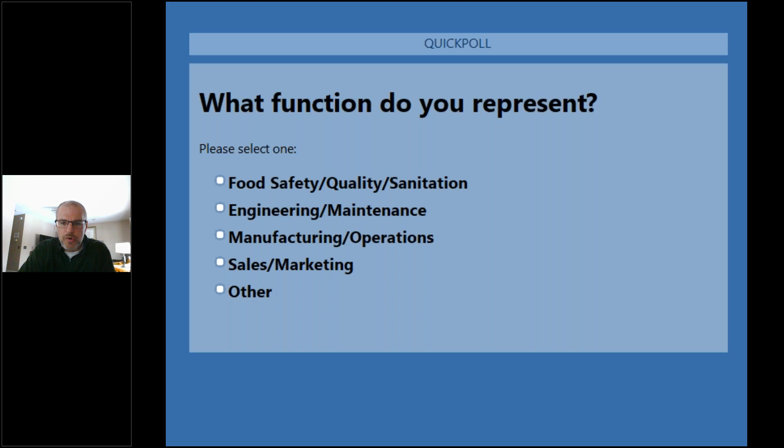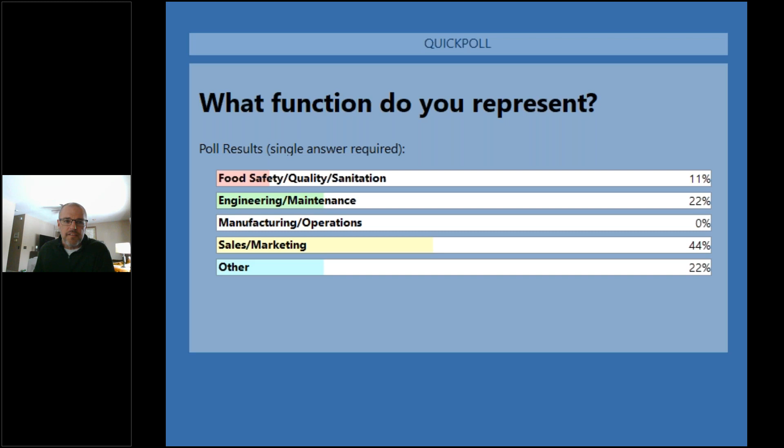This isn't just the function of the food safety and quality team. All of these functions are critical to delivering safe quality food to our consumers. So back to this keeping things simple concept. I like the KISS philosophy, and I've changed the wording a little bit here, but I like to, number one, obviously keep things safe, but keep it simple as well. And I think if we focus on standardization and keeping things simple going forward, it'll drive improvements around food safety, human safety, improving the environment, sustainability, and equipment reliability. All of these things will benefit from us thinking about simplicity of processes, equipment, and managing our people and processes.

So I really like the fishbone tool, and I think it helps explain where I'm coming from on this, to really think about reducing losses. It's sometimes hard to get people aligned with some of our goals and expectations. A lot of plants and companies are doing a really nice job managing food safety and delivering against those goals, and it's maybe hard to get some changes in that area. But if we can get people aligned with, hey, we can not only deliver safe food, but we can deliver cost savings and capacity to the business by focusing on this metric that I'm going to introduce here.

But we really need to align on this concept of simplicity and standardization, which again will drive food safety as well. So the three I want to highlight here are machine, method, and thinking about our personnel as well, and we'll get into more detail there. But the driver for all of this, and the metric that will be the catalyst to drive this, I believe, is thinking about how do we reduce the labor per unit operation.

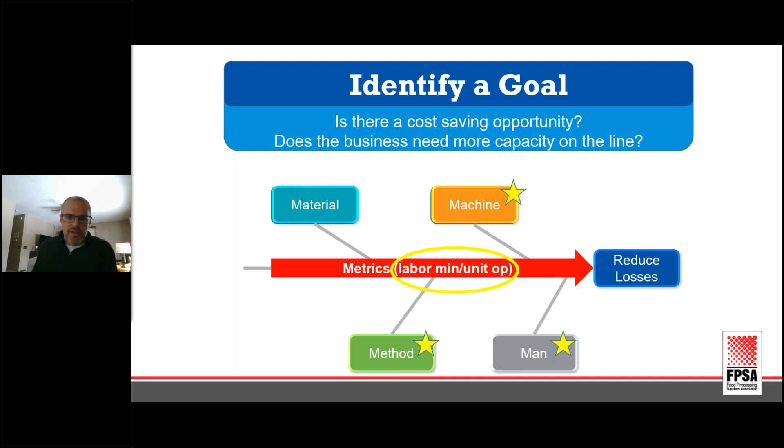So the first one I'm going to focus on here is the metrics, right? So we think about those downtimes kind of as a black box, especially as it relates to changeovers. So how do we break open this black box?

You think about, hey, we're really running blind when we shut our systems down to do cleaning and changeovers and all the activities, whether it's inspection, maintenance tasks, setup, while we're shutting down those systems, especially in areas where we're doing manual cleaning, which is obviously the case in a lot of the low moisture food, baking, cereal, snacks type of environments that we're focused on today.

So we want to go after understanding the time, the resources, and the labor that's being tied up into that. It's challenging, right? It's not like we have an automated system where, like when we're running our equipment, we know how fast belts are running, how many cases are coming out the back end. We've got all that information coming at us, and we can measure and report against that. We've got to figure out a way to do that during our planned downtimes and these activities as well. So we've got some ideas on how to do that and drive that forward.

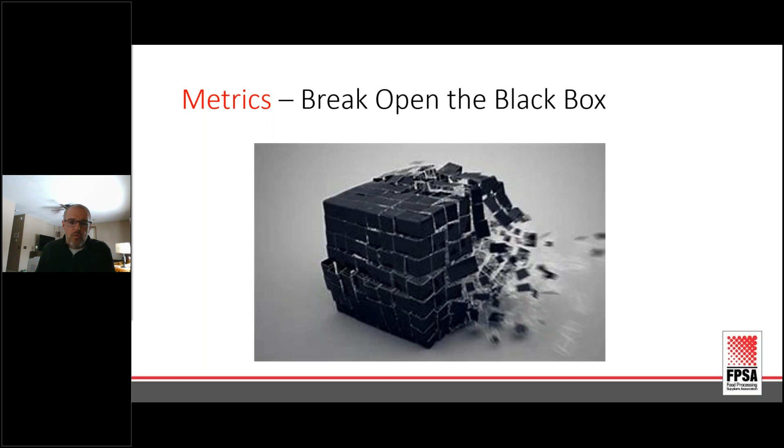So really want to focus on labor reduction, right? If we can simplify downtime activities, I want to drive down the amount of time I'm spending in these activities. Just like I mentioned earlier, in your kitchen, you want to get in and out of there very quickly and do something more value added and more interesting than cleaning or maintaining an area. So how do we get our people skilled up to do those tasks and simplify those skills as much as possible?

Just like in my kitchen, most people can go into a kitchen and handle the minor amount of disassembly and cleaning processes that are in there, put things in dishwashers, and meet the expectation. We get into our plants and there's a lot of complex unit operations, and it sometimes takes a whole toolbox full of tools to dismantle and get access to clean those adequately. So how do we drive towards more of the environment that's like your kitchen and simplify things there?

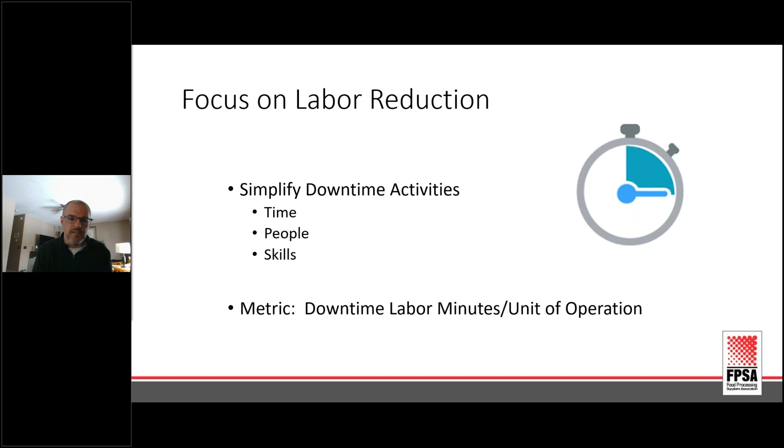So again, focus on this metric of looking at downtime labor minutes per unit of operation and really understanding, with that information, where are our bottlenecks at? Where can we push back on the equipment manufacturers and maybe modify current equipment to drive down that time? It might be simple things like maybe we could change the guarding so it's not so heavy and complex that I need two people to remove it. Maybe I can change the hardware so it's a simple tool or no tools. There's a lot of basic concepts that could gain us a lot of time and efficiencies, and then drive down food safety risk as well, not only from a micro or allergen standpoint, but also minimizing the risk of foreign material because somebody put something in the wrong spot or didn't assemble that unit op correctly.

So I think that, oh, go ahead. I was just going to say, when people think of downtime, there's planned and unplanned. When you're referring to this metric about downtime labor minutes per unit of operation, you're talking about total downtime, both planned and unplanned, correct?

Right, I think our biggest opportunity right now is the planned downtime. There's still so much opportunity there where we know we have to shut down systems for formula changes or food safety reasons, like an allergen change or a micro risk that if I continue running, I'm going to increase to an unacceptable risk level. So I think the big opportunity right now is our known planned losses and going after those. And then I think there'll be a huge benefit to unplanned as well, and we'll minimize some of those unplanned losses too. But this is the primary focus right now, is planned. Thanks for the question, though.

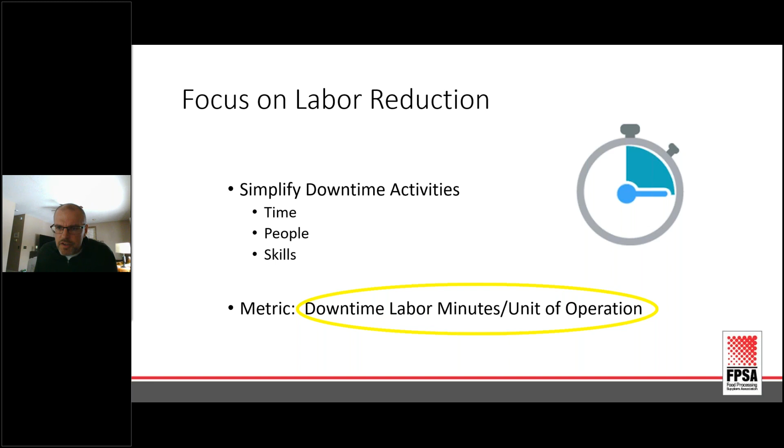All right, I'm gonna try, my next slide is related to education. I'm gonna try to do another question here under the polls. Let's go back to the kitchen analogy. Hopefully this launches and you can answer the question around what is the source of the highest bacteria counts in your kitchen gonna be?

Hopefully people see that. I don't see any answers yet, so I'll let you work on that for a few minutes while I talk about something I'm really passionate about.

Our personnel and education are key. We need to understand the audiences we need to educate—not just our plant personnel, but also the original equipment manufacturers. How do we advance from just focusing on sanitary design, where we've made huge advancements in recent decades around sanitary components and basic principles, to now designing in sanitation? How do we think about and model sanitation ahead of time, and prepare to minimize the impact?

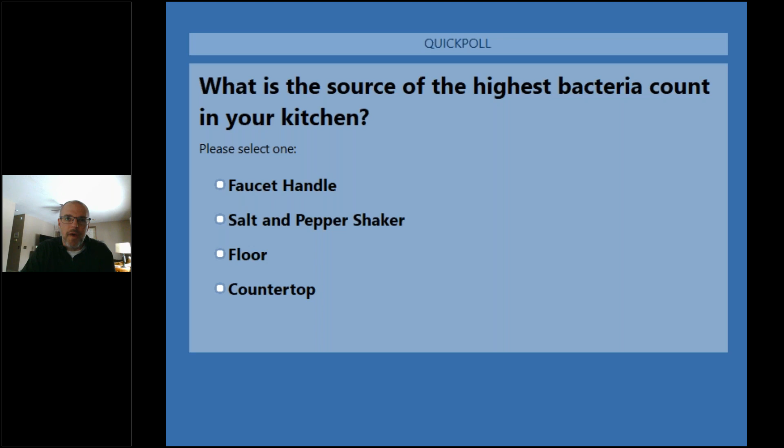How do we design equipment so it gets clean during the cleaning process—just like your car? How would I design a car differently so it got cleaner going through an automated car wash, or made it easier for a person doing their own cleaning? This concept of advancing to make it not only an effective cleaning design, but an efficient cleaning design as well.

Then there's onboarding and orientation of the people executing these tasks—full-time employees, temps, seasonal workers, and their leaders. More and more, sanitation tasks and many food safety tasks are being executed by operations. So how do we give them the information they need to succeed in executing those tasks?

The answers: 38% said faucet handle, 50% said countertop, 13% said salt and pepper shaker. Surprisingly, the salt and pepper shaker.

The reason is it's an area that gets touched going back and forth—salting and peppering meats, then touching the meat after it's been prepared, maybe using that shaker again. There's not great separation between raw and cooked, and people just aren't thinking about it or addressing it regularly. So maybe take a few minutes to wipe down your salt and pepper shaker, as it could be a point of contamination for bacteria in your kitchen.

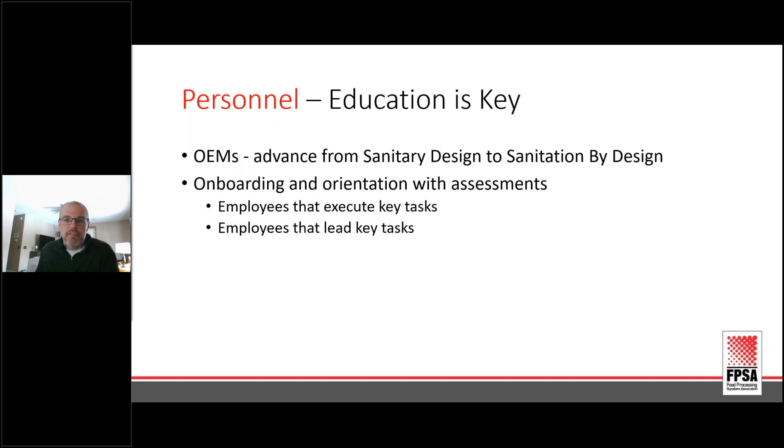I'm super passionate about training and education, and I think we need to think about how to do that differently going forward. We've got challenges, especially today, staffing our facilities—how do we get people up to speed faster, and what's the best way of learning and educating them?

For me, at least at home, when I'm learning a new task or facing a challenge, I go out and YouTube it. I figure someone else has probably already figured this out and maybe has a nice tutorial, a how-to video on how to do this.

We've done something similar. If you search the internet today, you could look under General Mills sanitation videos—I've created a few videos out there that hopefully you'll find helpful, covering some basic concepts, chemical titration demonstrations with one of our suppliers, and how to do a post-cleaning inspection.

We've also thought about the audience, knowing that language can be a barrier, so we've done this in multiple languages. You'll see there's an English version, and then also the language we've translated it into as well.

That's not the whole answer, though, because it's sometimes difficult to get our employees in front of a screen—whether it's a smartphone, tablet, or computer. We don't have unlimited resources there either, so we have to figure out how best to get our messaging, information, and training to our employees.

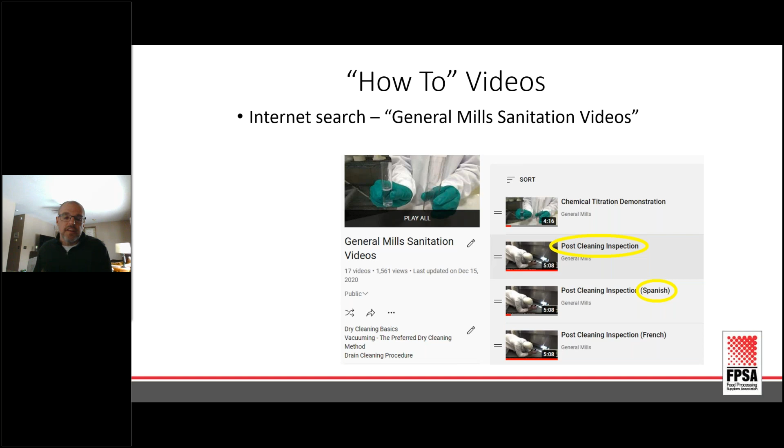Part of the solution might be giving them simple, short videos and tasks that they can rewind and watch again, to make sure they really understand how to do it well.

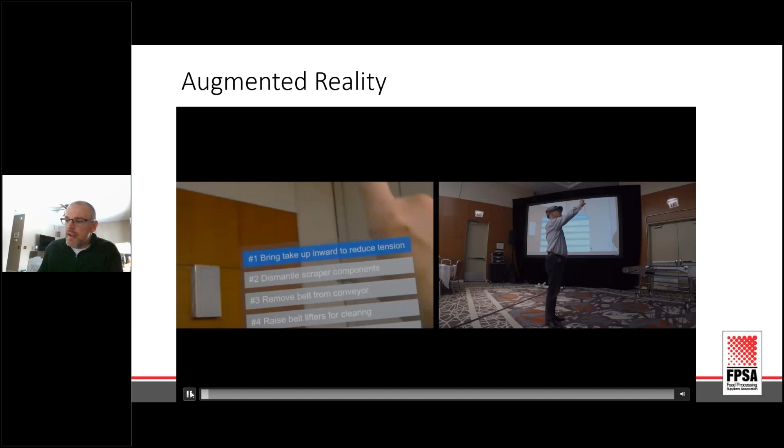Another tool that I've seen that I think has a lot of opportunities is augmented reality, and virtual reality as well. The example I'm going to show is from a workshop where we brought in a conveyor and a company to help us with a headset and augmented reality of the situation of how do I clean and dismantle this conveyor.

Here's a short clip that walks this gentleman through how to dismantle this conveyor, having the virtual conveyor in front of him through his lenses, but then also having the real conveyor there for him to actually execute and test out his skills now that he's learned them and walked through the steps. Hopefully you can see this advancing here.

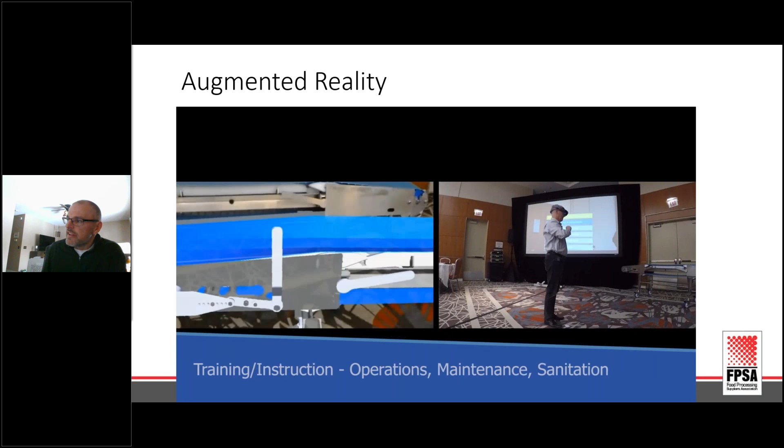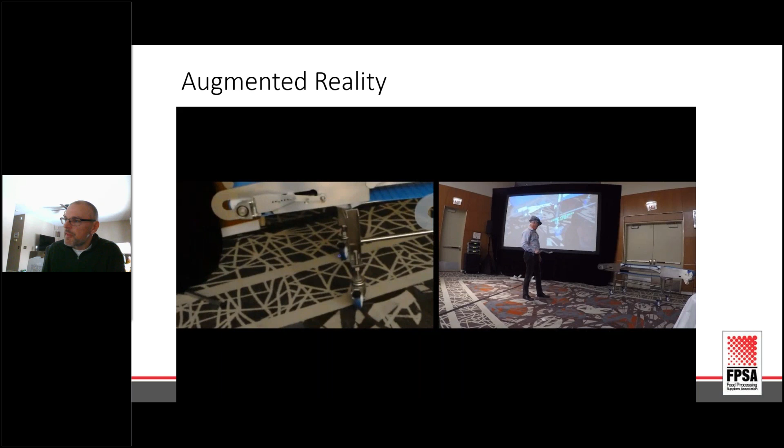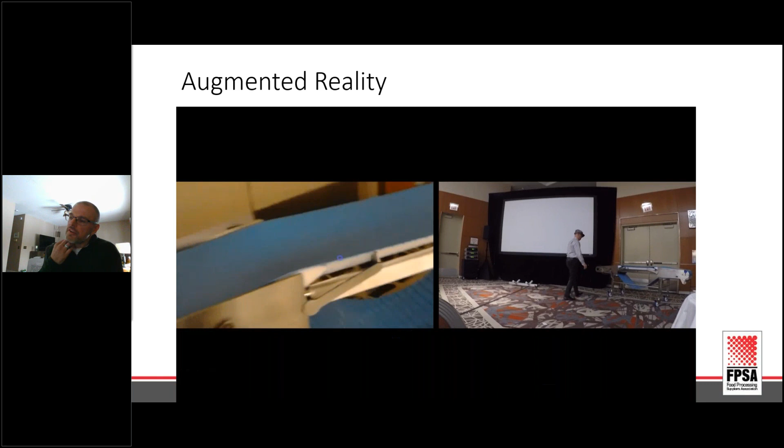He's interacting with those instructions up in space, and there's some verbiage on this augmented conveyor that shows him, hey, I need to put this handle on here to detension the belt, and then he's going to go do that himself. So without any further instruction or involvement from a coach, he's able to execute that pretty easily.

So I think there's a lot of opportunity for this process to be utilized more to educate people even before they get out on the production floor. We can do this in a safe environment, maybe not have the equipment there, but at least see somebody walk through the procedure virtually for education, for troubleshooting. There's a lot of opportunities for this technology into the future.

The next one I'll highlight that we're also investigating is looking at remote assistance. How do we connect subject matter experts with the field, with the plants and the teams that need their support? So we're looking at these headsets that you can link in with a web meeting. I can live stream through this, one employee walking around doing his or her job or investigating the situation, and then have that conversation with maybe a vendor or supplier that's got the expertise.

Maybe we've got it internally, maybe we need to get a group of subject matter experts together. This has been really helpful for us, especially in this current environment where travel is really under scrutiny and control. We can send fewer people to do maybe a factory acceptance test or to help us solve a problem. I think this has got huge value going forward to help us connect the right people to solve the problems that we have in front of us.

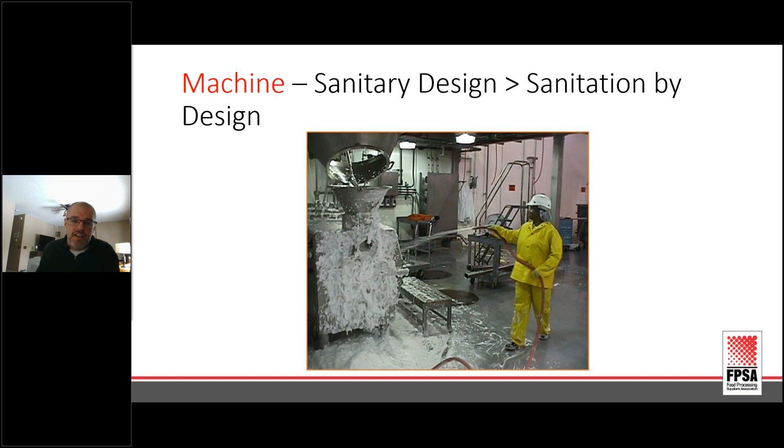So again, that's focusing on labor and what do we do in design to reduce that labor. I truly believe if we can get people thinking about this and push back on the vendors or on these expectations, they do phenomenal work and come up with great solutions to make design changes to meet those needs, and we can make a huge impact for the business and for food safety.

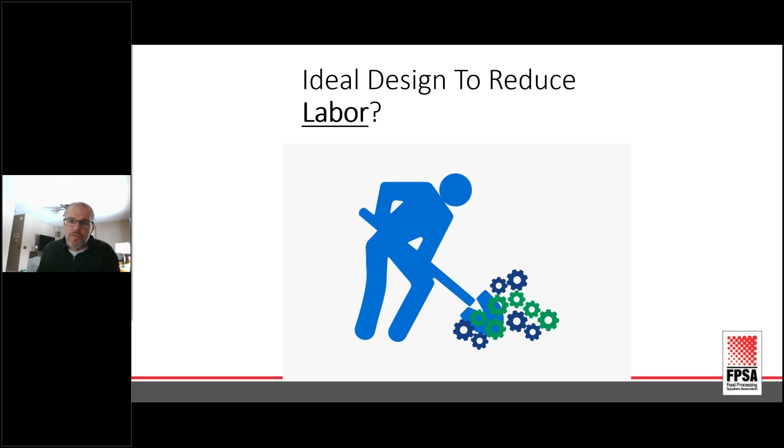One of the things I think about, and we'll talk about more in just a few slides, is what is the preferred method of cleaning, right? Just like in your kitchen, I would prefer to throw everything in the dishwasher. I don't like spending my time in the evening standing over a sink and hand washing things.

So we have the opportunity to make more things cleanable in an automated washer, especially in the environment we're talking about, with very limited opportunity for clean in place or true CIP circulation type cleaning. But there's definitely opportunities to use tunnel washers and cabinet washers, dishwashers, those types of things to help clean things out of place and make sure we're cleaning them to a specific standard with the right parameters and repeatably, versus people that are maybe not so experienced in the cleaning process, who might not always execute the clean as we want them to.

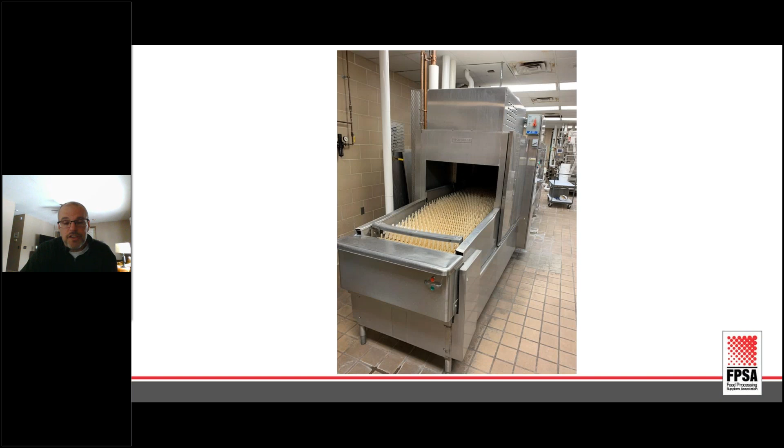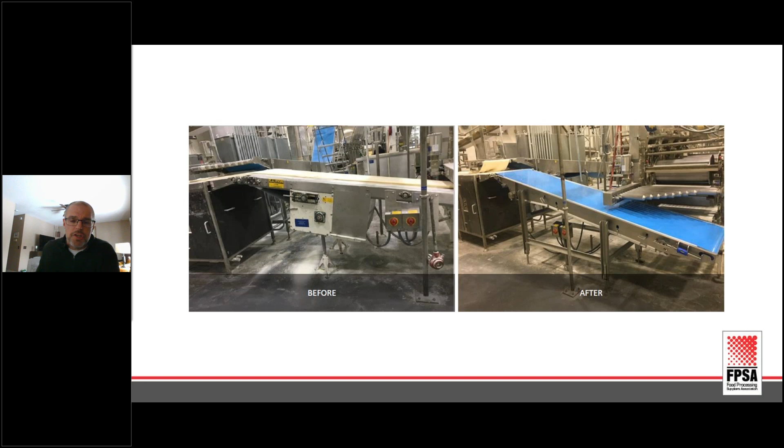So huge advancements here in design of product conveyance. That's going to help us from a human safety standpoint, ergonomics, changeover time, and even product quality can be improved by focusing on this. So I'm going to show you a couple more videos that show some of the advancements we're thinking about that meet our needs from a food safety and efficiency standpoint.

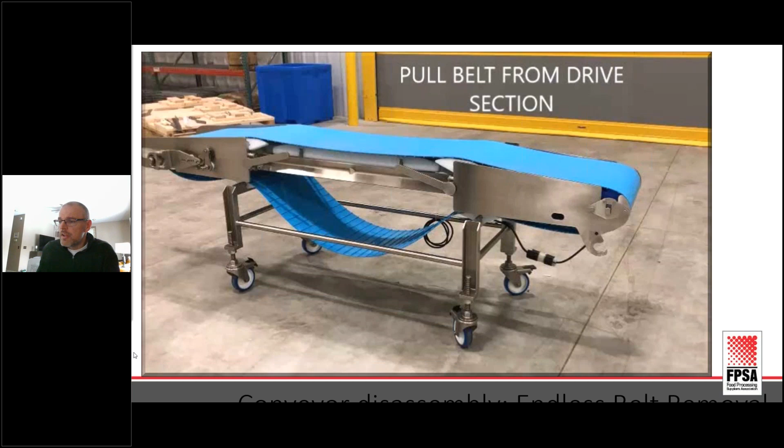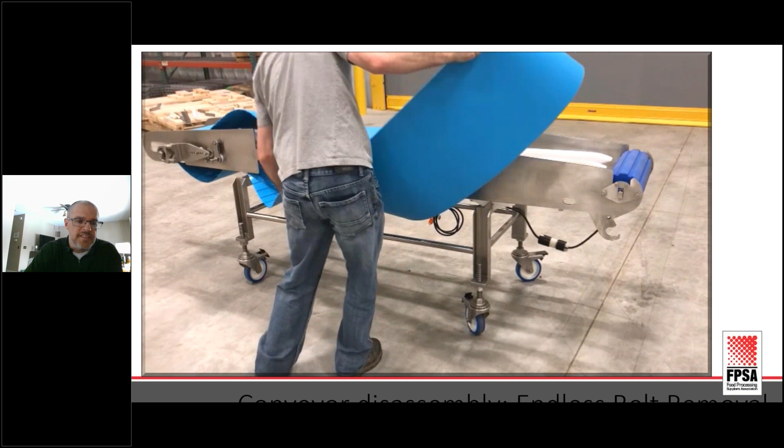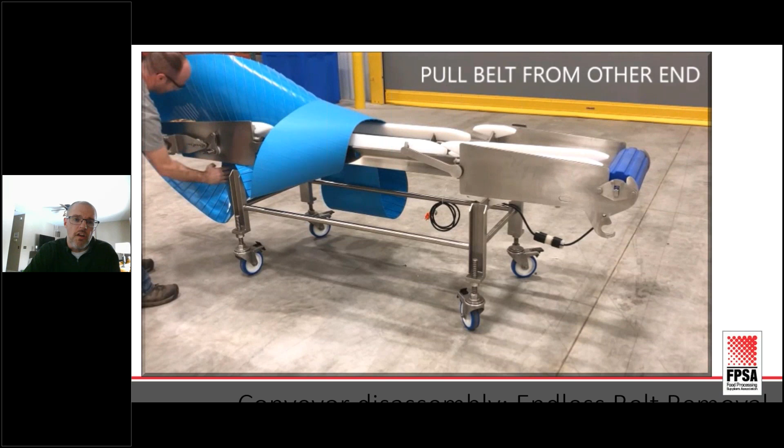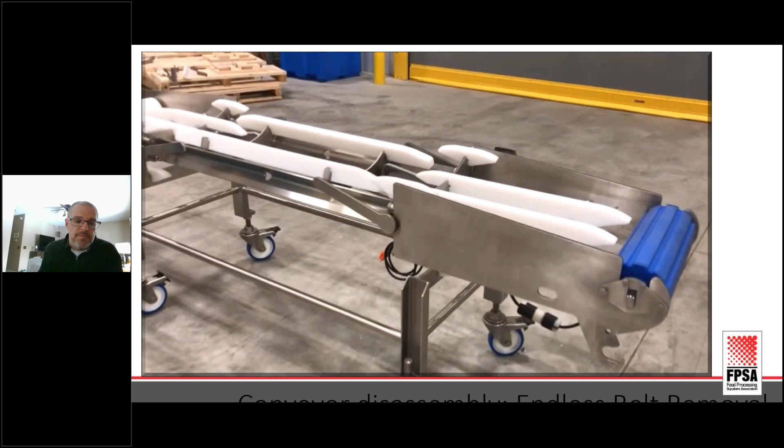Hopefully you can see the gentleman there. This is the same belt we were looking at earlier where it was easily detensioned. This is a nice C-channel design, so you can pull the conveyor belt off, but even if you can't on a certain design, you can at least detension it and get underneath the belt easier to address all the surfaces that may have an allergen, a micro risk, or a flavor we've got to address. This is a great example of one person being able to dismantle this. And as we move forward, you can see these exposed components inside for supporting that belt. I've got to advance to the next one here.

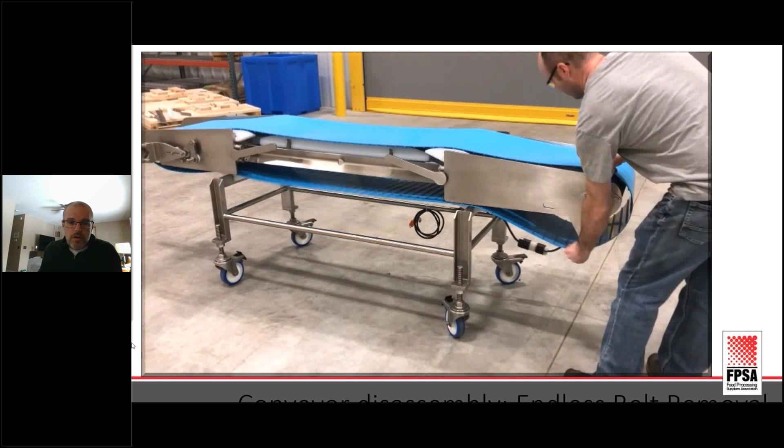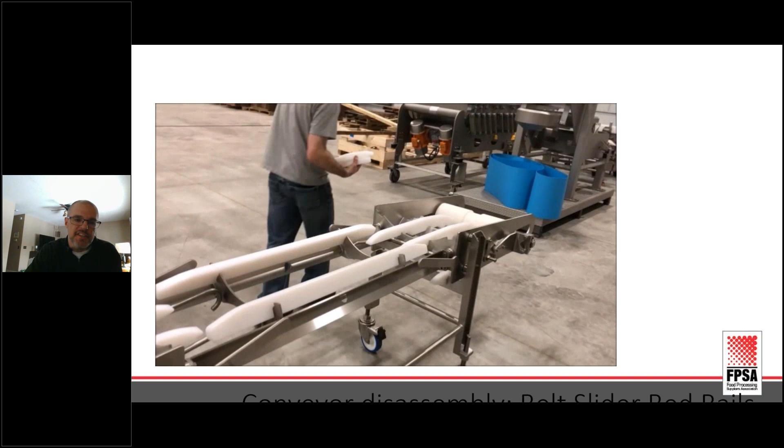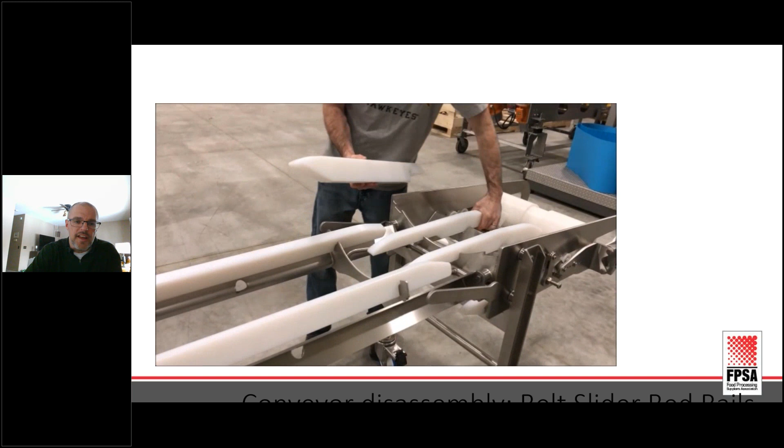You can see he can easily remove these without tools. There's going to be some bad practices here you're going to see in a second. Unfortunately this was not in a plant environment, this was in a machine shop, so we'll give them a little leeway here, but we should be setting this on a sanitary table, getting these organized and having them marked so you know which spot they go back into.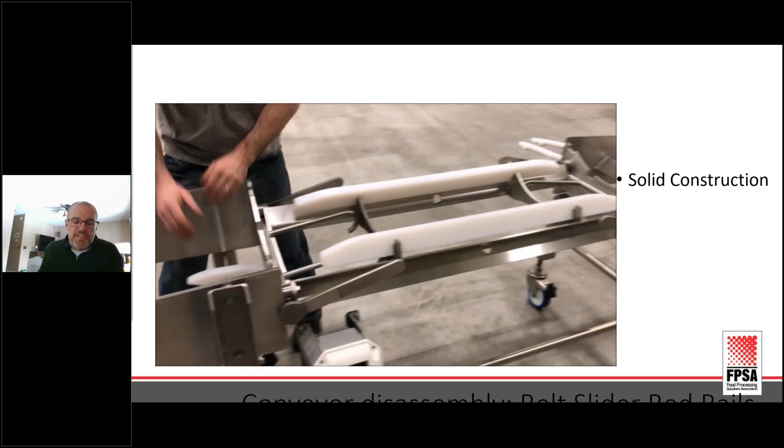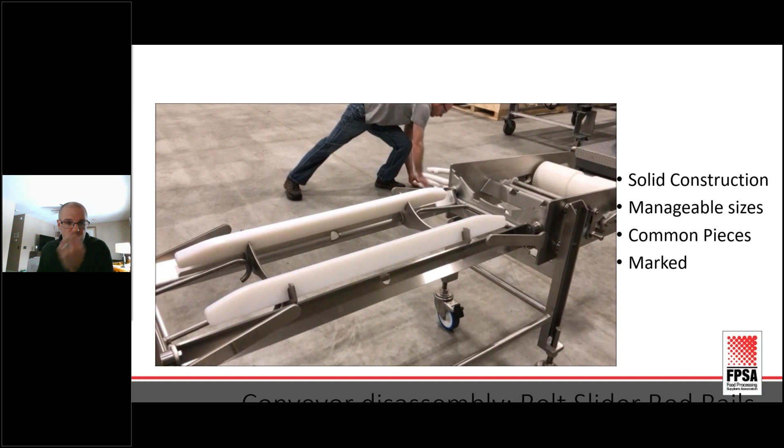And understanding the sanitary design improvements that we've seen over the years: solid construction, manageable sizes for one person, common pieces, marked for reassembly, making sure we don't mess anything up going forward. So some great examples - stainless steel design, minimize the surface area - all around leading to a faster, more effective clean.

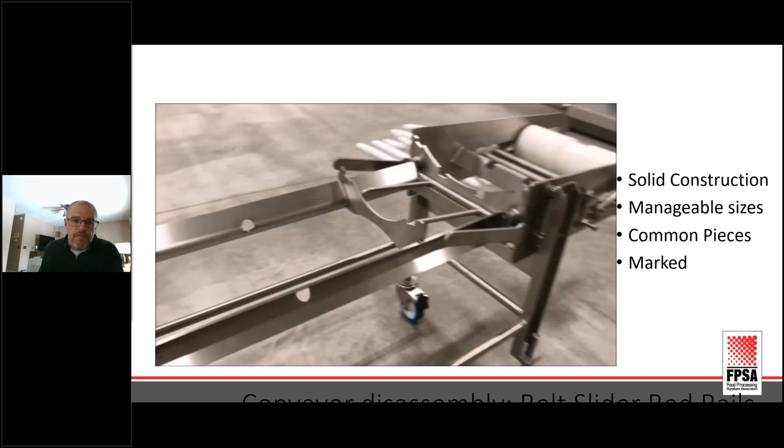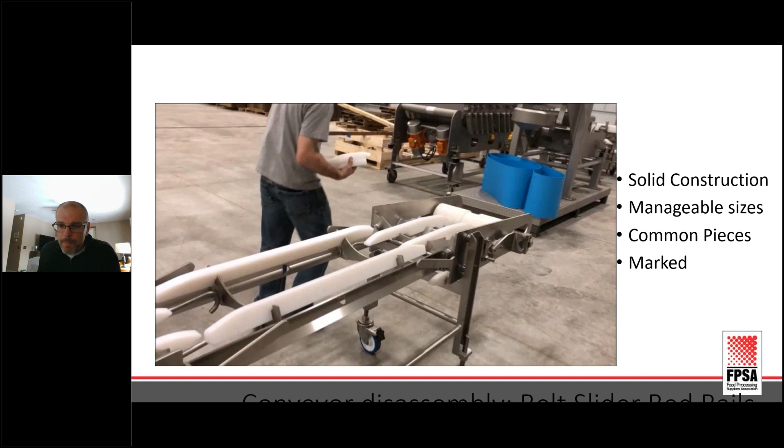Let's jump to one more poll question here. And I will hit launch there. So hopefully you can see the next question I have there: is it acceptable to dry clean for allergen removal?

And you're going to see that I have an interest in keeping things dry as well. We talk about our war on water and our belief that if we can focus on keeping our environments dry and minimizing the use of water, we can really minimize the impact of microorganisms, especially pathogens and spoilage organisms.

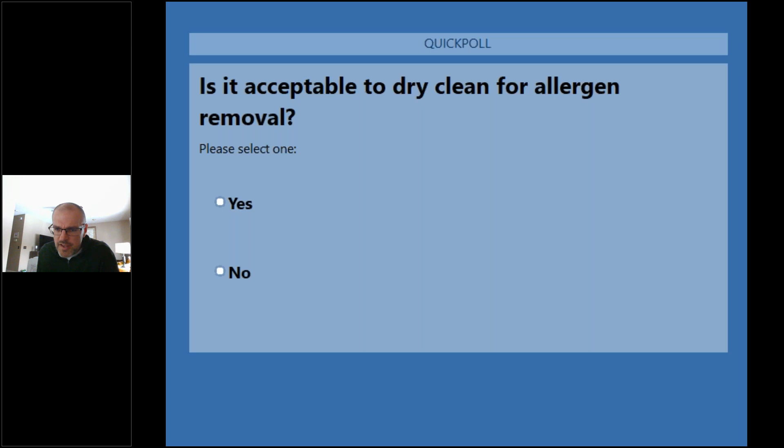So I see a lot of people have answered, thank you. The predominant answer has been no. I would argue that it could be either way. In some cases, it's very feasible to do dry cleaning for allergens. We have to meet a visibly clean standard and remove the protein from the surface.

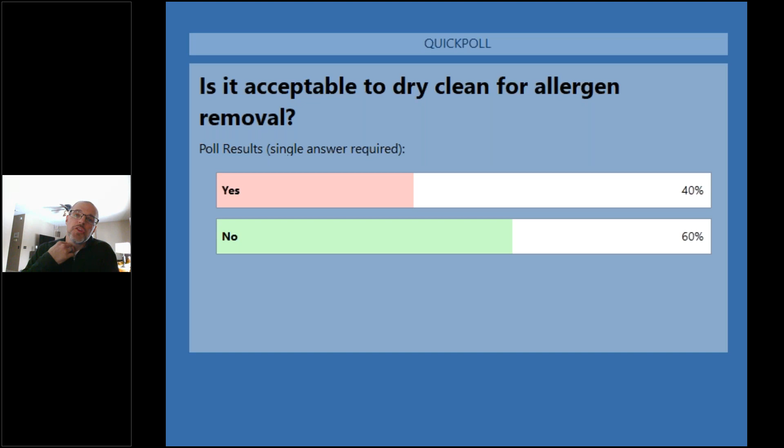It has been proven that with the proper access to the surfaces and the proper cleaning method, even dry, you can remove the proteins to an adequate level. Now that doesn't mean it's going to be zero, but we're talking about single-digit parts per million, and being adequate to remove that hazard for our most sensitive allergic consumers.

But there's a lot of cases where we can't do that, right? We have to use chemistry, we have to use water to remove those soils because they're sticky, because they're burnt on, because they maybe don't have the access that we'd like to have. So I'm going to get into a little more detail about my expectations for cleaning method.

We talk about method in that fishbone being a key piece of the equation. So sanitation is not a value-added activity - if we could eliminate it from our businesses, we would do that. Now it's extremely important and needed, but we would like to get to a point, if you're value stream mapping, this would be ideal state: no cleaning needed.

And we can get there in some cases. Sometimes we have redundant equipment or dedicated equipment.

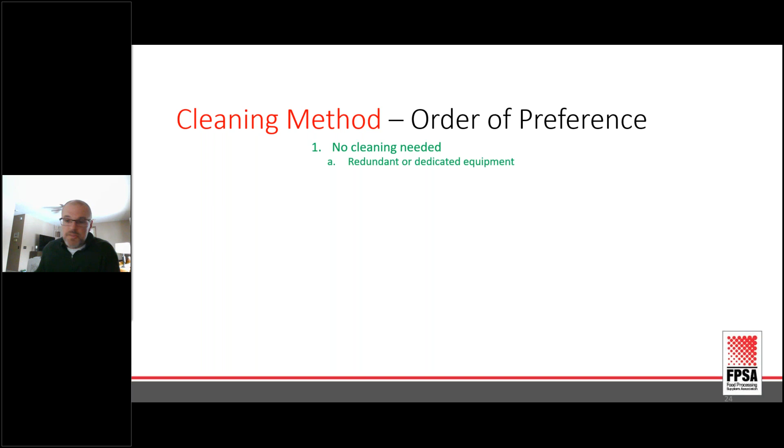I've got a dedicated sugar silo or a flour silo, or even a delivery mechanism for peanuts or tree nuts of another kind. As long as I maintain those and isolate them from the rest of the process, I don't necessarily need to clean or maintain those on a regular basis. So redundant dedicated equipment is a great answer if we have the capital and resources to do that.

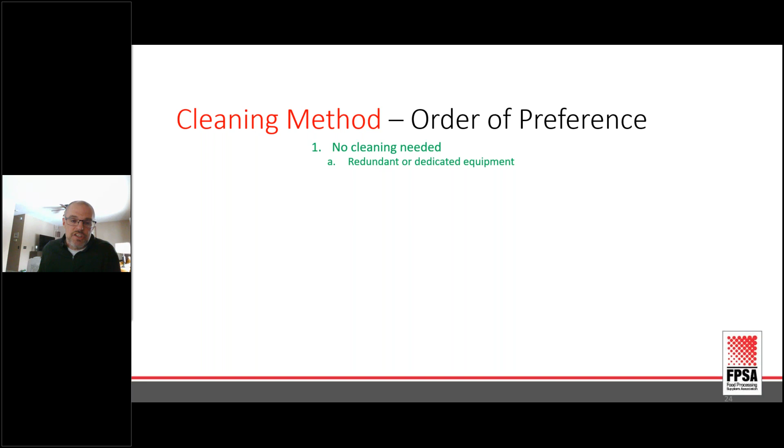If that's not going to work for a process, our next choice is to purge. Can I just flush through the next product, or maybe salt, or a next material, a pig, something like that, to purge out enough of the material to get to the next flavor, the next formula, the next ingredient that's going to meet our quality and safety needs. I'll show an example after this slide - it's a great example for number 2.

The next one is we need a more aggressive clean. We can do a dry clean with brushes, vacuums, squeegees, or scrapers, those types of things. And if that's not good enough, there are great tools out there to get after dry cleaning with chemistry now, non-aqueous, non-water-based cleaning processes. So those are my top choices.

Now, if I have to introduce water, and I get into this kind of yellow zone, CIP, or clean in place, is my first choice because of the automation and my ability to control for the parameters - time, temperature, concentration, mechanical action via flow.

My next choice is controlled wet cleaning out of place. So just like in the kitchen, we're not going to clean our pots and pans where we use them. We're going to pick them up and move them into a sink where I've got a controlled clean, access to a drain and hot water, and I can control my chemistry and water, all of those things. Preferably I throw it into a dishwasher - we talked about an automated dishwasher and how important I think that is for future designs.

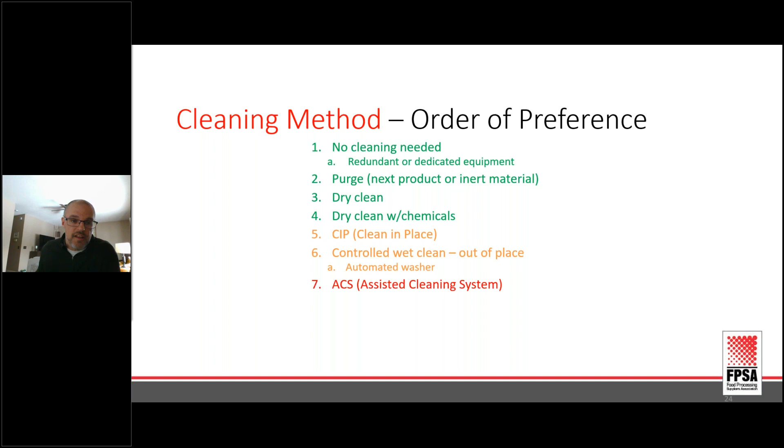Assisted cleaning systems, basically a more manual CIP system - controlled cleaning in place. A lot of our structures and framework can't move to the wash bay, so we got to clean them in place.

And then the most evil of all things is flood cleaning. I don't hear of a lot of people dragging a garden hose into their kitchen or a high pressure washer into their kitchen for lots of reasons, right? It's going to destroy your infrastructure. You don't have the water drainage to handle that. It's overkill in a lot of cases.

We need to get more focused on spot cleaning. Just like if I spill on my countertop, I don't go in there and flood clean the whole area - I wipe up just that area that's actually dirty. And I think there's an opportunity to do a lot more of that in the food industry as well.

So I rank these based on microbial risk as well as cost. And you can throw in there the impact to the environment and sustainability, and those types, and human safety as well. I think all follow this same line and train of thought here.

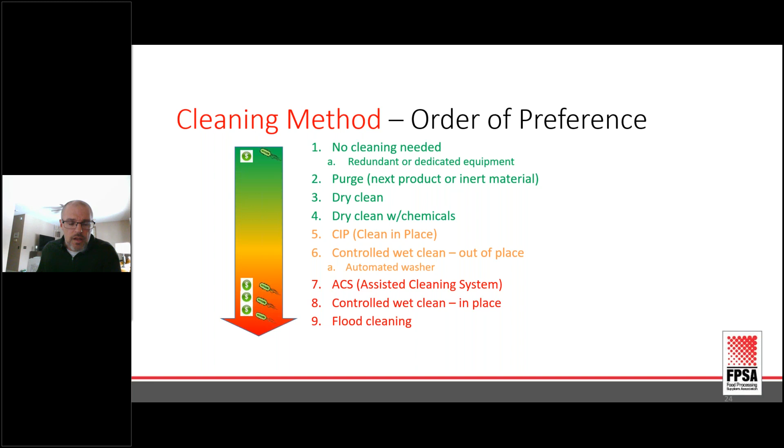I'm going to show you an example here of an extreme that we worked on. This is a granola bar system, a crunchy granola bar system that we have, and we would just utilize this system for making a dark chocolate product as well as an oats and honey product. There are no allergen differences between those two products, and they're a very stable product from a micro standpoint. Obviously it's going through an oven, but also the water activity is pretty low at this front end of the process. So if you're familiar with horizontal bar mixers, Sigma mixers like this, generally they're flood cleaned. We want to get away from that and try to think about different ways to manage this.

So first, we need to understand why we're cleaning. In this case, like I said, the formula is similar other than the chocolate. So I just need to get the chocolate out of the system.

So we want to think about, do I really need to spend 8 hours with hundreds, if not thousands of gallons of water, chemistry, putting my employees at risk, putting them in PPE, lockout, tagout, all that kind of stuff? Could I do something different?

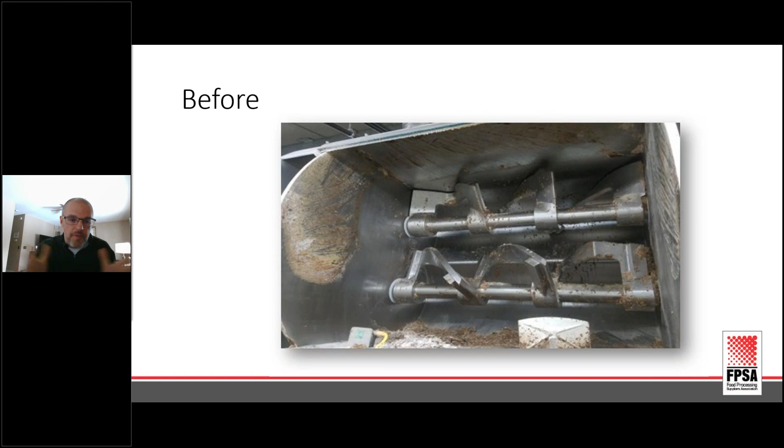So I had them take the trim. After the oven, we cut the bars, and there's going to be some trim and some waste there, and had them put that back into the mixer as an abrasive. So just like a rock tumbler, we're able to turn the beater blades and actually run them backwards and abrade away the chocolate there. And then it looked like this at the end.

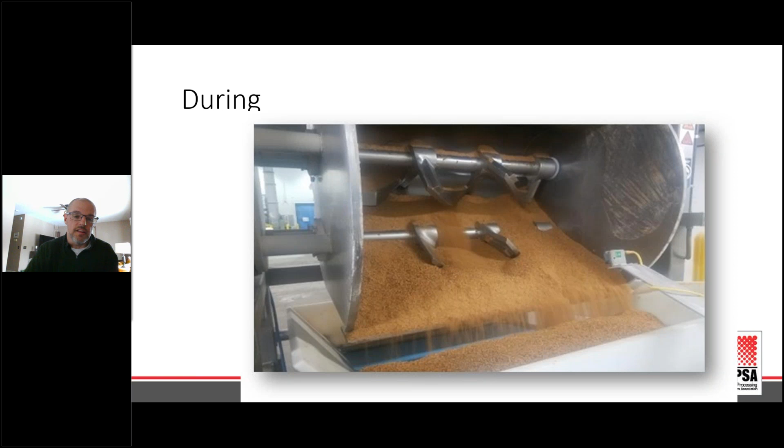So not perfect, but it meets our quality standard of not having chocolate in the next product. I'm not introducing a micro risk because I'm not introducing water. I don't have a significant micro load going into this. So it's really addressing a lot of needs here, and we're not having to do a lot of preventative maintenance work because I didn't introduce water. I'm not putting my equipment at risk for reliability. Just a lot of advantages.

So again, if we think back to that hierarchy of cleaning, I went from the very last choice, which is flood cleaning, all the way up to number 2, which is just basically purging the system from the previous product. So that's why we're trying to get people to think differently and how we can advance and be more efficient, but also significantly reduce our food safety risk in this scenario.

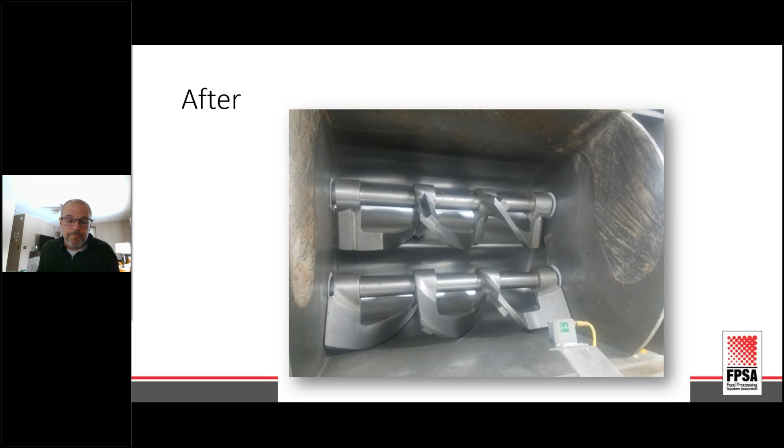So the key takeaways I have for you today are really the KISS principle. So keep it safe, which I think we've had a great focus on, especially over the last few decades, as we've had better understanding of the risk, even in low moisture foods, low water activity areas where we've had pathogen issues. We have more complexity around allergens and gluten-free products and those types of things.

So we now need to continue down that path, but also make things more simple in design in support of our employees and our businesses. We need to focus on our personnel, right? Knowing the labor challenges we have, how do we reduce the number of people that need to do the work in those activities and reduce the time that they need to do those jobs? So those are huge multipliers in cost and in capacity losses, those types of things.

The other one I didn't list here, but obviously education and training people, the why, whether you're a supplier or a person working in a food manufacturing facility, understanding why and giving you the skills that you need to be successful. And then, moving to sanitation by design and talking more about it up front versus just dealing with whatever you're handed as far as design for facilities and equipment, but being more proactive, putting metrics, success criteria out there with our vendors and saying, hey, we got to do better and we need you to help us move down that path.

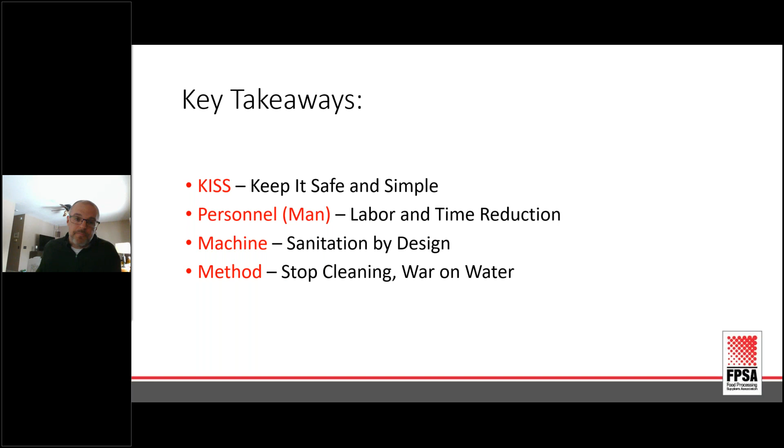So I will open it up. Are there questions that are showing up out there, Chuck, or do you have any?

Yes, we did have a few questions come up. The first one deals with the manpower issue. One attendee noted that it appears there's some new thinking and innovation needed, but that's not always aligned with how companies are deploying their personnel and resources. Are there things machine manufacturers and food companies can do to tip that balance so you're getting the right quality of employee associated with solving these problems?

Right, and I think it comes back to our lack of data and analytics on this too. I think if we better understood how drastic we could make improvements, there would be a significant ROI on this. So understanding better our bottlenecks in the process and how much improvement we could see.

I've looked into and calculated examples myself. We have a wide variety of product platforms, everything from raw flour all the way to thermal processed soups and everything in between. There's a dramatic difference in the amount of labor and time it takes. I've seen as much as, comparing a meat facility versus a bakery, it could be 10x the time to clean that system.